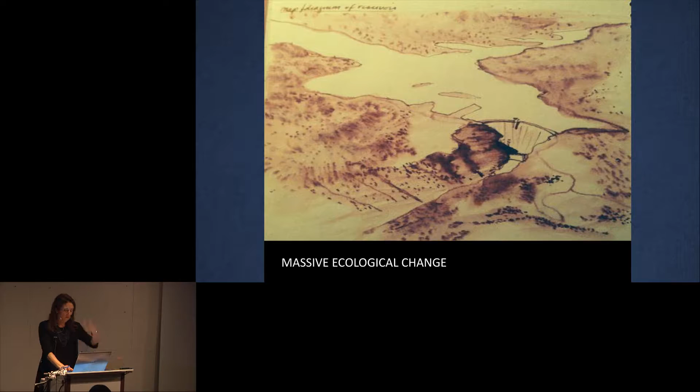But infrastructure, which is kind of my muse as a term, developed in the World War II era in reference to military logistical operations. And General Eisenhower, after the war, created the federal highway system with a $25 billion investment in our national infrastructure. So he called it the Federal Highway Defense System, and this is really important because it was a political issue.

You had a country that was really wounded by war, and he created this idea for connectivity that was pervasive, and it was cast as a way to make sure that every area of the country was safe because it was connected, but it also led to massive economic development in terms of the post-war suburb that we know today. And unfortunately, there are people in government who still believe that the building of these kinds of highways is about economic development.

The problem is, though, when our infrastructure is not being destroyed by robots or saved by Bruce Willis, we tend to find it a bit boring. As you know, infrastructure is not a sexy or a glamorous topic. As much as I like to think otherwise, infrastructure is not sexy. Infrastructure is not very sexy. Yes, infrastructure, like those men we just heard from, is not sexy. So I apologize for blowing the timing on that.

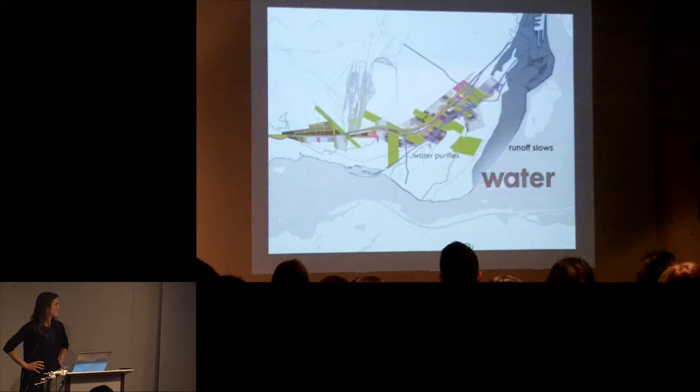Things you may have noticed in that video is that the infrastructure actually takes up a huge amount of space in the city, and it's an incredible opportunity for us to think about how these systems can be actually integrated with the urban design. So a lot of the work that I do relates to the intersection between roads and watersheds.

When the highway system was developed in the US at least, it wasn't really planned for going into cities. And so it actually took an extra 10 years to build. And so a lot of the work that we're doing now is trying to reconcile the issues that have been created by this, and water is one of the critical issues.

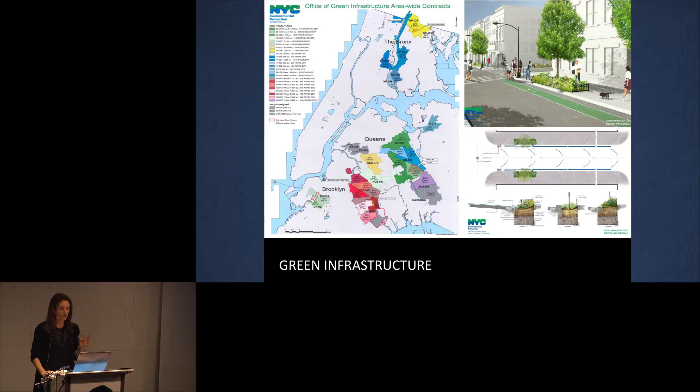So we've been working on a lot of different strategies, working with government agencies to develop new prototypes and thinking about watersheds throughout New York City, but also thinking about how these systems are compromised by climate change. I'm actually from Vermont, and this is what happened after Irene.

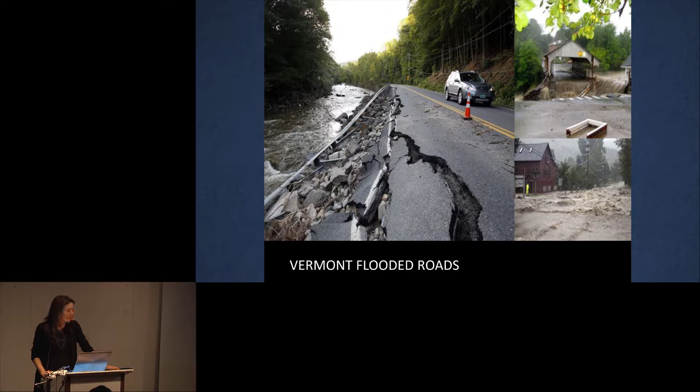So I think that, since Irene and since Sandy and since Katrina, there's been much more of a new awareness of urban hydrology. And that also is the case in the United States because of the signing of the Clean Water Act and the Clean Air Act in the early 70s. Nixon signed these laws and also created the Environmental Protection Agency, which is now actually putting pressure on city governments to clean up their water systems, their sewage systems, their freshwater drinking systems, and their stormwater systems.

And so on the local level, you get a lot of mayors that are now getting a lot of pressure from the federal government to make change. And we're fortunate to have a really brilliant mayor who was a great sort of organizer and created this thing called PlaNYC, a Greener, Greater New York, which had a set of metrics for how to improve the city. And some of those metrics related to improving the environment, adding green space, making the city more livable.

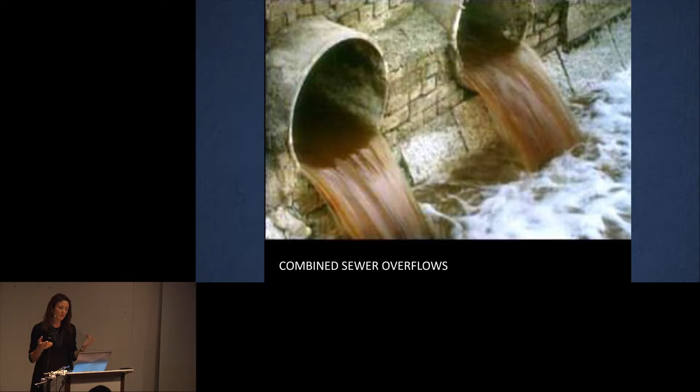But across the United States, there are 772 cities that have combined sewer systems. And Thomas Crapper did not invent the flush toilet, but he popularized it. And because of his work, the combined sewer system was invented. Basically it brings together sanitary sewers and stormwater sewage

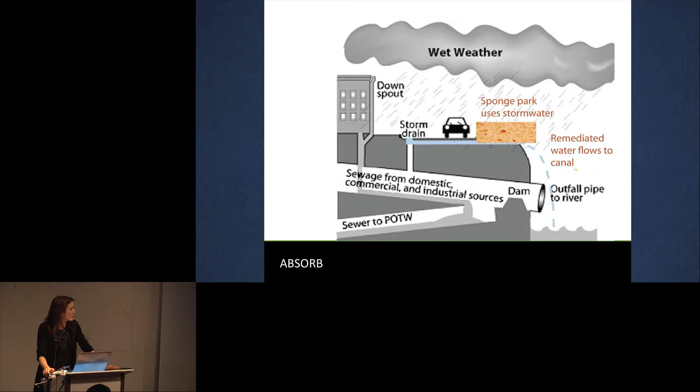So this first project I'm going to talk about is called the Sponge Park. And the idea is that we want to make more absorbent surfaces in non-absorbent urban areas to absorb this water to keep it out of the combined sewers. The project is located in the Gowanus section of Brooklyn. This is Gowanus. My office is right over here. And you can see that the area has transformed from a swamp in the 1700s to an industrial area by 1891, and then into a kind of quasi-post-industrial area by 2007.

So the premise of this is that wetlands act like sponges, but I wasn't going to go into a community and say, I'm going to put a bunch of wetlands in your backyard. That just wasn't going to fly, right? So I had to come up with a euphemism for absorbent ground, for wetland, for swamp, right? And so we came up with the Sponge Park, and people get it, they love it. Because what you're doing is basically making this surface more absorbent.

So in general, the firm tackles a lot of these global issues with local pilots, and the Sponge Park is a really good example of that, because we started doing the initial planning working with the Gowanus Canal Conservancy, which is a community environmental group, and we got a grant from the New York State Council on the Arts to do that initial planning. And then we applied for more grants working with the Gowanus Canal Dredgers and the Center for Urban Pedagogy, and we got a grant from the New England Interstate Water Pollution Control Commission. That enabled us to do working drawings for a first pilot project.

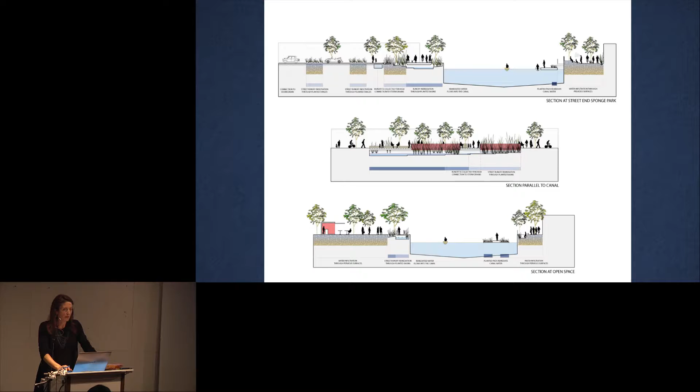But we added new programs. We were trying to create a continuous hydrologic system that sort of brought back some of the old swampland in a way, but it's an urban setting. So we're not going to just turn it all into parkland and bring back the swamp. We're going to make space that's usable. So this is an example of how we would do that with walkways over wetland areas that were sited below.

So when we started doing this work, city planning was actually thinking about redeveloping the area for residential use. And one of the things the city was doing is creating a lot of waterfront esplanades. Our city planning commissioner was the planner for Battery Park City. She had an idea of what waterfronts should look like, but there was this idea that there'd be an esplanade, and it would be either 20 feet or 40 feet. So we helped to suggest that it really should be 40 feet, that we really needed that additional space to create more public amenity.

But then what we noticed was that a lot of these buildings abut the canal and create blockages to the idea of a continuous esplanade. And of course they do, because this is a place of industry, a place of exchange, right? It was a place where you'd bring your boat in and you'd offload into a building that was right along the edge of the canal.

So we thought, well, maybe we shouldn't think about creating a continuous esplanade. Maybe we should actually think about maintaining that industrial character and creating what we called an urban promenade and bring the pathways back into the community. And in that way, we're not just privileging the properties along the water's edge, we're redeveloping the whole community. We're adding value to the whole community. And we're providing environmental benefit because we're greening those streets and providing connectivity to some of the existing parkland.

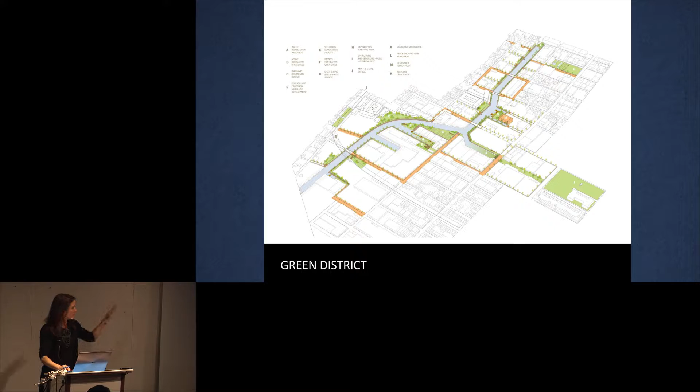And our idea was to create an entire green district. So you can see this was adding, I think, 5.2 acres of permeable ground to the area. We calculated that we needed 11 acres to basically absorb all the surface water runoff in the area. And there are already some existing parks. So this would pretty much solve the stormwater issues in the area without having to build billion-dollar sewage treatment plants.

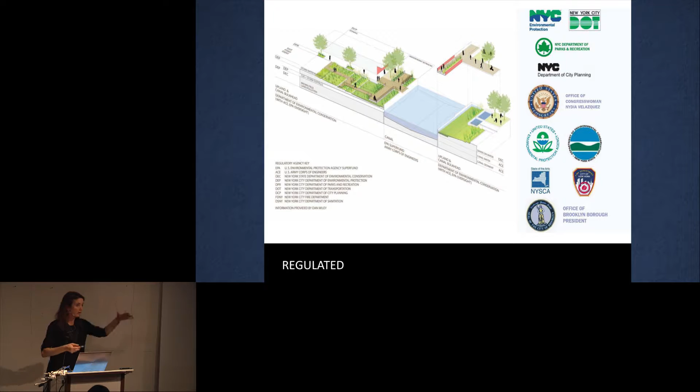So we started with a first pilot project, but just to explain what it's like to work in New York City and how complicated it is, the Gowanus is a navigable waterway. So the water is controlled by the Army Corps of Engineers. The sediment underneath the canal is also controlled by the Army Corps, but in the middle of our work, it was made an EPA Superfund, which added a whole other level of approvals. The first 5 feet of soil in the upland area is controlled by the Department of Environmental Conservation, which is a state agency.

The surface of the ground is owned by the Department of Transportation, which is a city agency. All the green is Parks Department, and they have to maintain that. The water that flows over the ground is the Department of Environmental Protection, which is a city agency. And then even the shade over the water is controlled by a state agency. There are 200 permits you have to get for any waterfront project, and it's phenomenal how long it can take and how complicated it is.

But one of the things that was really important about this diagram is that it showed the agencies that we knew who owned what. So it reduced the amount of churning that could exist where they're like, well, I don't know, so-and-so is in charge of this, and we could say, no, you don't own that.

DOT owns that, and you're in control of that, and you're in control of that. And so we were able to use this diagram to facilitate a faster decision-making process. It still took 8 years to get our first pilot done, but we're doing it.

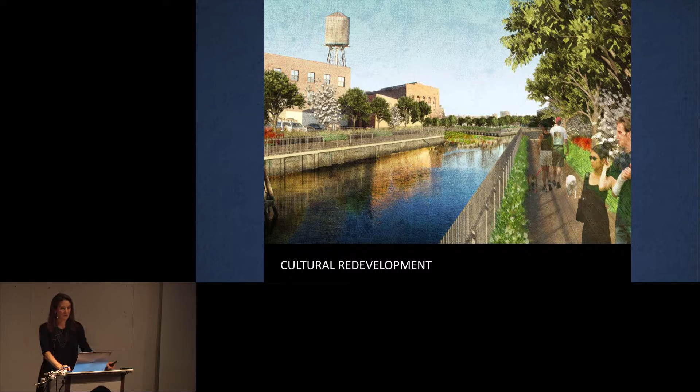So part of the overall master planning involved cultural redevelopment. We're actually working for a private entity that bought this building and is turning it into an art center, which is exciting because it was part of our plan. But this pilot project that took 8 years to build is right at 2nd Street.

And you can basically calculate the amount of water that's flowing down the street, and then you can create a stormwater system to manage that. But that's very sort of perfunctory and all that engineering. What we wanted to do was make a new open space that could be part of this overall system. So this is the first piece, and these street ends could be replicated. The idea is that it's a pilot.

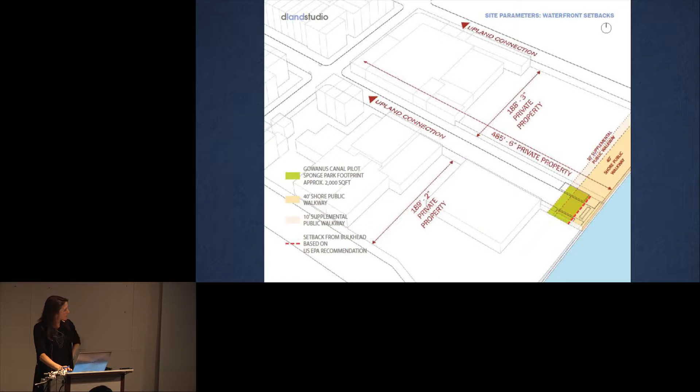So we worked within the 40-foot setback that the city had established. And this is the typical sort of street in Gowanus. You can see they're pretty degraded streets. But we had to submit our materials to another regulatory agency called the Public Design Commission. And the PDC is very sensitive about the use of materials and sort of the historic context.

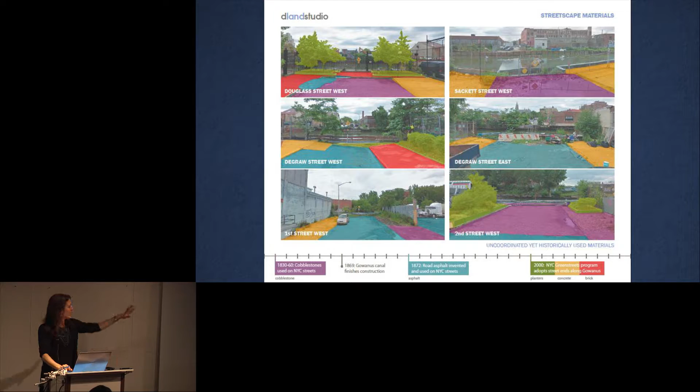So what we wanted to show here is that there are a lot of different materials, and they're kind of all over the place. And this is our existing street, and so what we're saying to them is, that's the existing condition, we're just moving things around. We're not actually making a huge change in terms of the historic context because there really isn't a historic pattern. There are a lot of materials and we're just reorganizing them.

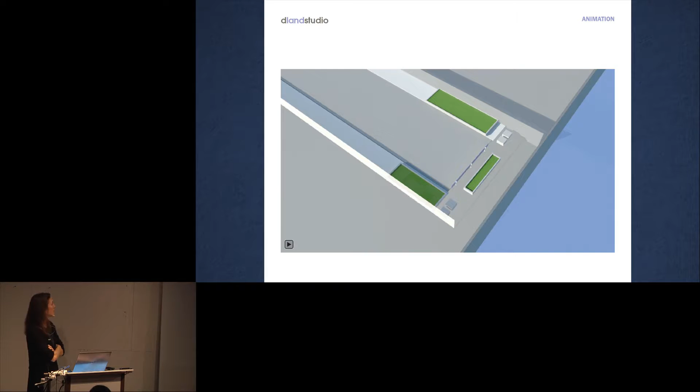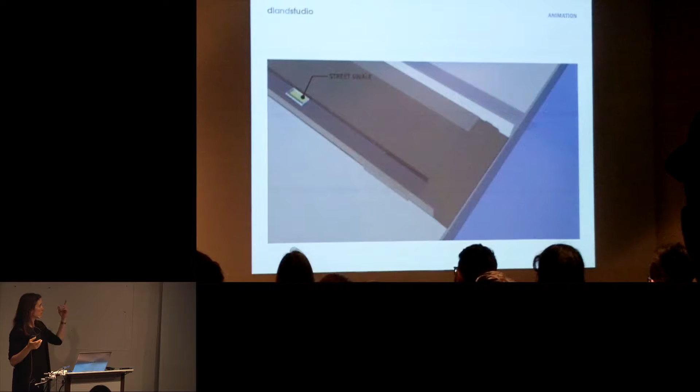So this is what our Sponge Park street end would look like, and this is kind of how it works. This one doesn't have sound. So this is the existing condition. These are these green streets that were put in by the Parks Department. So we're taking those out because they can only absorb the water that's falling into them. We're putting in new upland street swales, similar to the DEP standards.

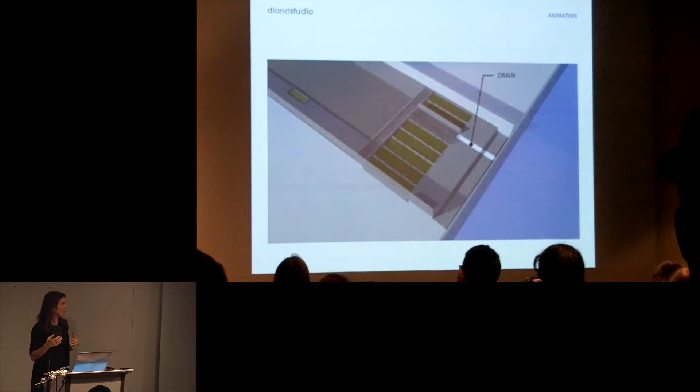And then this is really important. We built the whole system out of precast concrete cells so that it could be replicated very easily, and then put in this integrated sidewalk and sedimentation basin. And there's also a pedestrian path over a sand filter, so that's kind of an extra level of protection. And then a drain that goes into the canal.

So when it rains, basically the water's going to come down. Some of it's going to be captured by the upland bioswales, and the rest of it goes into this bioretention basin, which distributes it into the planting beds. And then the plants are going to be in the soil, and the plants are going to take up that water, evapotranspirate, use it to live.

Then if we get a really big rain above the 1.2-inch rain, which is 90% of all storms in New York, then it'll go into the sand filter and then go into the canal. So this area is tidal.

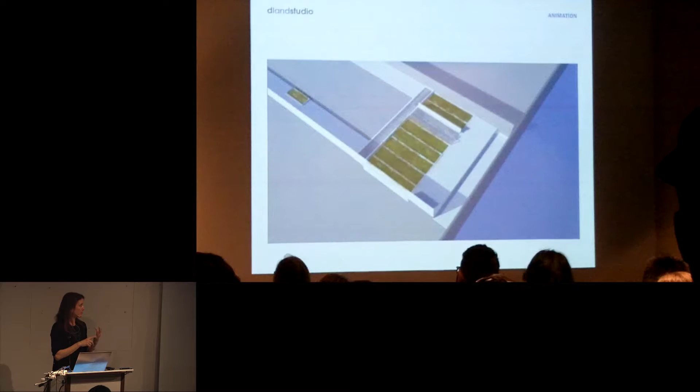So building a system that can be installed in a modular way quickly was really important, and the use of precast concrete was also really important because you can't pour concrete when you have the tides going up. The contractors had to schedule around the various tidal calendars. But I like to joke that it took 8 years to get all the approvals and 8 weeks to build.

So it was just like we had everything figured out, and it was kind of good because when we were doing it, the EPA Superfund people came out, the administrator, and he wanted to make changes. But we built it so quickly, which is great. It's like, sorry, Christos, we can't change that now, it's too late. And he said, you've gone too fast, sorry. Which is unheard of for a Department of Environmental Protection project. Their projects, they usually do $1 billion sewage treatment plants that take forever.

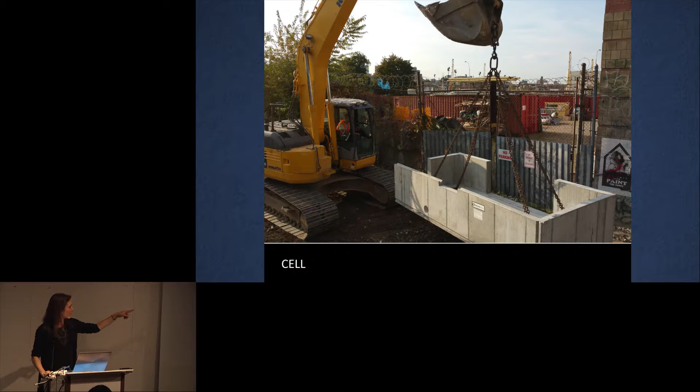But here you can see that the cells, they're big. It's kind of a big thing to do as a precast element, but here they are going into place, and this is it on October 21st, and then this was when the New York Times photographed us. The plants look kind of cruddy right now because it was put in kind of after the frost, but I think in the spring they'll come to life. With landscapes, it takes a little while for them to take off.

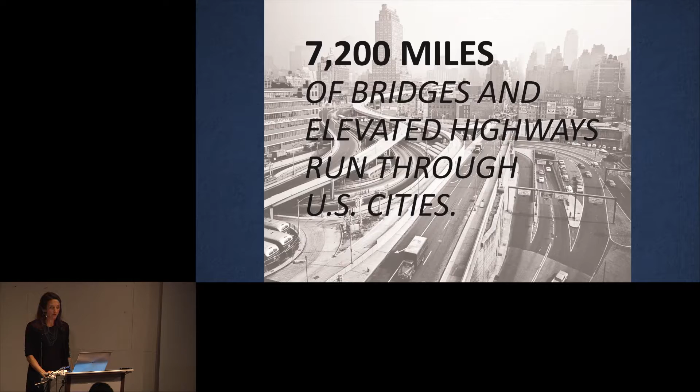There are 7,200 miles of bridges and elevated highways that run through U.S. cities, and I've been the Urban Design Fellow for the Design Trust for Open Space. And this is something that I was looking at for years before I became the Urban Design Fellow. And it's sort of a great marriage in a way, working with them, because we're looking at the 666 miles of elevated structures in New York.

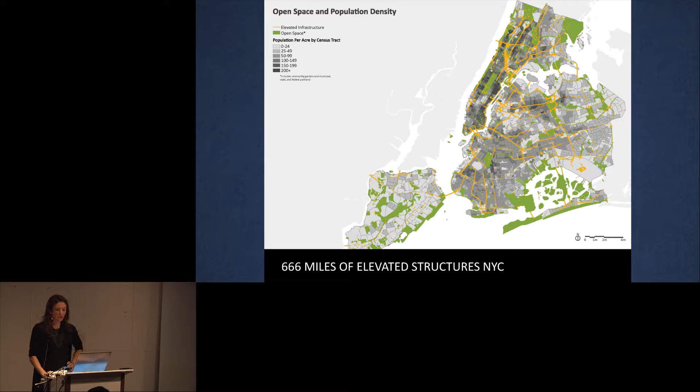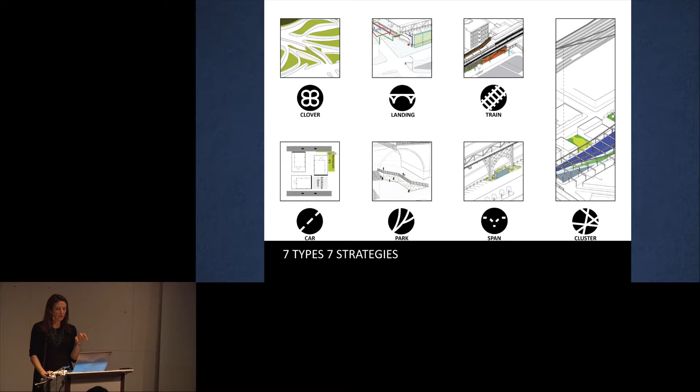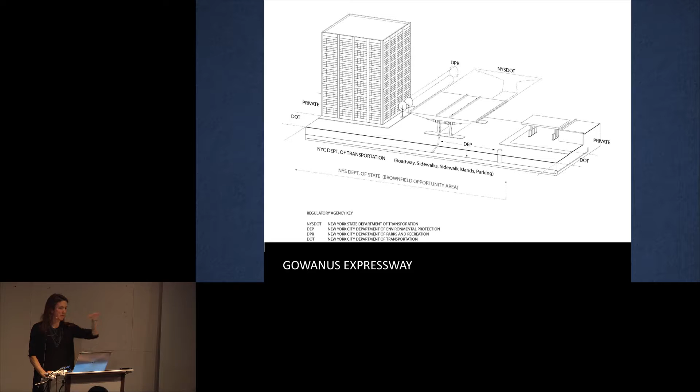One of the places that we looked at was the Gowanus Expressway, which is a very typical condition of a large expressway with a lot of space underneath that's currently used for parking. It's not the highest and best use of this space, in our opinion. So we thought, why don't we start to take it over and think about how we can manage some of the water coming off of the raised highway in like a pop-up green infrastructure system.

And then maybe we can start to also have spaces underneath this highway where you can have maker space, where you can have artist studios, where you can do the stuff that's being displaced from some of the inner manufacturing districts. Like Gowanus is now becoming much more residential. So the artists don't have anywhere where they can make a mess and make noise. And so we thought, why not have a place where you can have saws and do welding and that kind of thing.

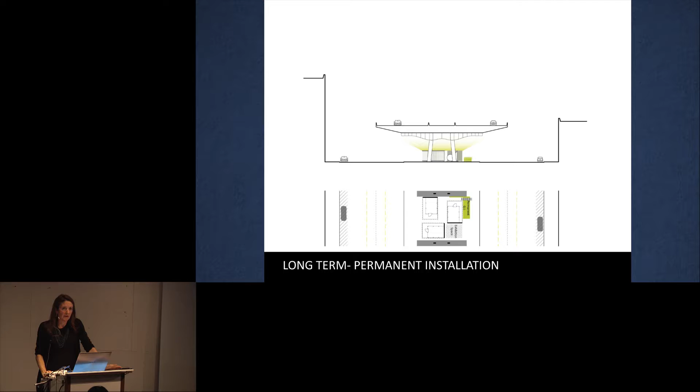And then in the long term, maybe we turn this into art studios. We actually have something that can exist in that space, free of the columns, because the people who maintain these bridges want to be able to have access to the columns on the underside of the structure. But there's a lot of space there. And we should be using it because it's just too valuable to waste or to just give to parking.

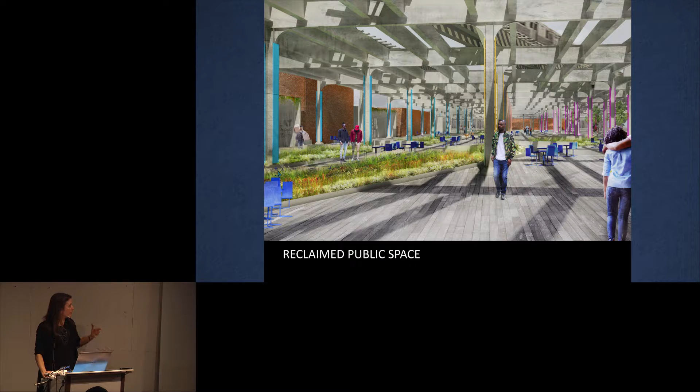Then in another area, Broadway Junction is a place where you have subways and cars and trains all coming together, and it's incredibly hard to sort of figure out where you are. So we want to try to reclaim that public space with wayfinding and planting and seating and make it into something that sort of celebrates the infrastructure rather than just sort of manages it.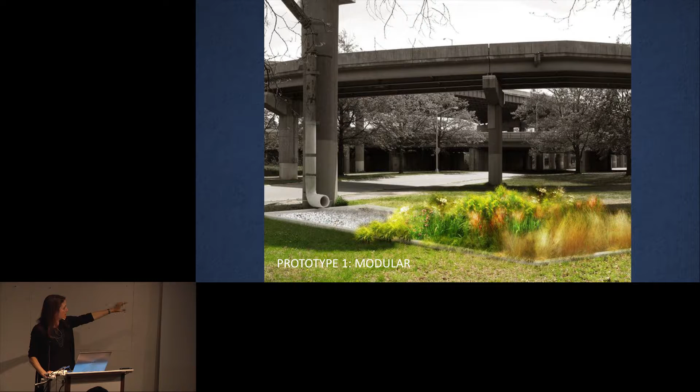So here you can see we basically just took the section of pipe off. It was just allowing the water to go out onto the street. So we took that off and we put on our own new pipe, which was probably the biggest challenge, having the state DOT let us touch their pipes. But we built this in a public park, and you can see again there's the sedimentation basin over here, and then this is it in construction. And then this is the one with the gabions.

Now, one of the issues that happens when you create wildlife in the city, or you make a house for wildlife in the city, is that we've created the perfect habitat for this muskrat. We're monitoring all of our projects to see how much water is coming in, how much water is going out, and what the water quality is going in and out of the system. And we have these vaults with the monitoring equipment. And the angle at the bottom of the vault, there's a slight angle so that it will drain, was the exact angle of a muskrat lair.

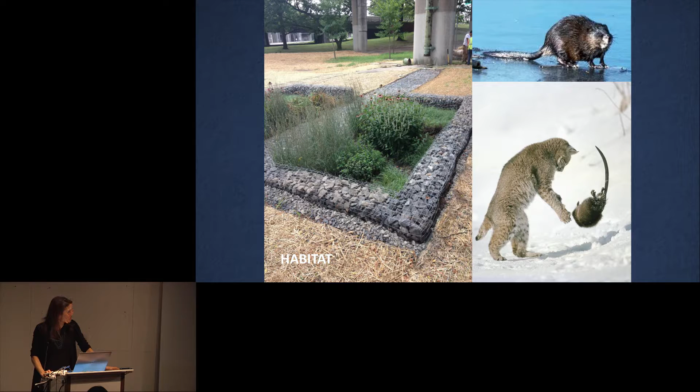Like the things you wouldn't think to research as you're designing your green infrastructure. But anyway, this muskrat moved in and was like, hey, they built me a condo, this is really nice, but he was chewing up our monitoring equipment and leaving candy bar wrappers and just all this crap in the vault. So we didn't introduce bobcats. We actually came up with some other design solutions. He's just there for scale, but you never know.

So there are 35 million US residents who live within 100 meters of a 4-lane highway. And for the last decade, I've been working on another muse, the Brooklyn-Queens Expressway. This is actually fairly close to my office. This is Carroll Gardens and Cobble Hill. So I had a grant from the New York State Council on the Arts and created this vision for that section of the BQE, which then got the attention of a city councilwoman who hired me for some additional work.

But one of the things that I found really important early on was to attach design to economics. We used U.S. Forest Service data to create this diagram that suggested that 350 trees would generate a $50 million gain over 10 years. So this shows the power of communication through design. Because this Forest Service document was just this really boring tome, a lot of words, and we turned it into this one-page diagram.

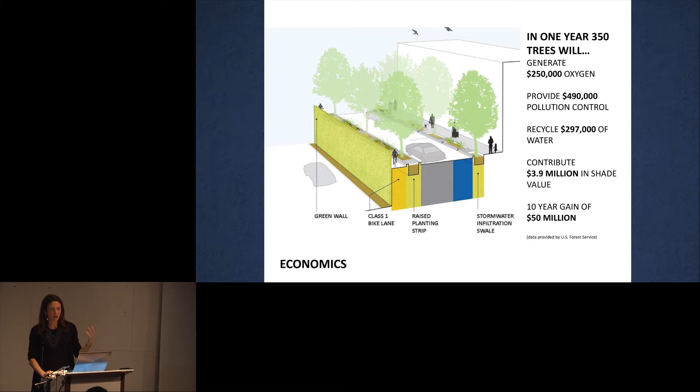So we can substantiate everything we did by going back and referencing that document. But the suggestion that we're creating all this pollution control and oxygen generation and shade value is incredibly powerful and can be used as a political tool. And who was the master of politics more than Robert Moses, who created the Brooklyn-Queens Expressway in the first place. Moses did a lot of great things in New York. He created a lot of parks and playgrounds and open spaces and parkways to get people out of the city and out to the country and the beaches.

But unfortunately, he also did this. He created landscapes like the Cross Bronx Expressway and the BQE, which really did a lot of harm to communities. I would say he did kind of a bait. He proposed these beautiful parkways. And I just want to read this.

And he, Robert Moses, spent a lot of time looking down at it, watching the cranes and derricks and earth-moving machines that looked like toys far below him, moving about in the giant trench being cut through mile after mile of densely packed houses, a big black figure against the sunset in the late afternoon, like a giant gazing down at the giant road he was molding.

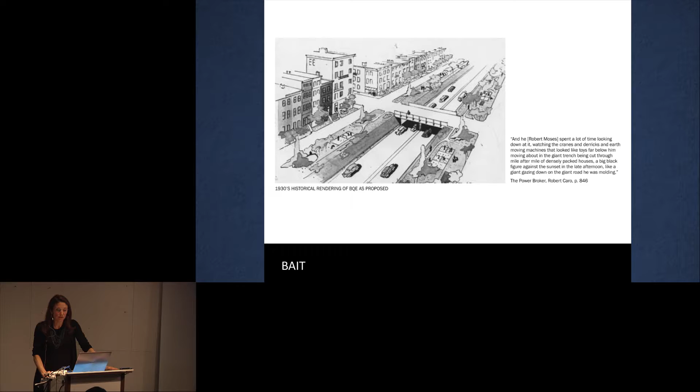This is from The Power Broker by Robert Caro, which you should all read if you want to be students of infrastructure. But he had an apartment in the Bossert Hotel, which actually looked down at this from Brooklyn Heights. And so these are the actual derricks cutting through this brownstone neighborhood. So all of these brownstones were just eliminated to make this big road.

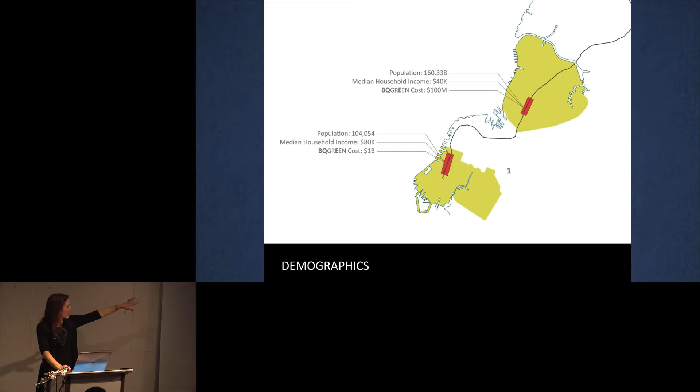So I've been working in a couple of areas. I mentioned that I started looking at the BQE down in Carroll Gardens, but then Councilwoman Reyna saw that work and brought me in to work in her neighborhood, which is Los Sures, which has a much lower income and a much higher population. So it's actually a much less expensive project. I feel like it's something that just has to happen. So I've been helping her politically for the last decade on this one as well.

But the BQE creates a lot of physical boundaries, which you can see in both cases. The section that we're focusing on was built in 1950, and that's important to remember. It's an area that creates territorial boundaries, with the Dominican gangs on one side and the Puerto Rican gangs on the other, and the highway actually creates the site of conflict. So we want to think about that.

We looked at public health issues in relation to the BQE trench, physical activity levels, and neighborhood poverty. All of these data sets were used to make an argument that this park space should go in. And then we also looked at the amount of open space.

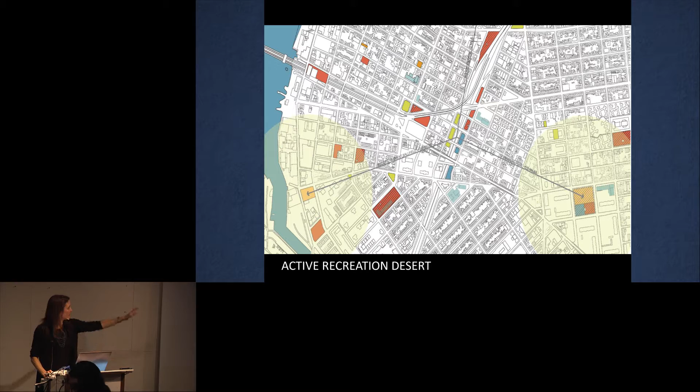There is some space along the trench that is used for tot lots, but there isn't a lot of active recreation space. There's no space for teenagers to go run around. And that's a problem given the high incidence of gang violence in the area.

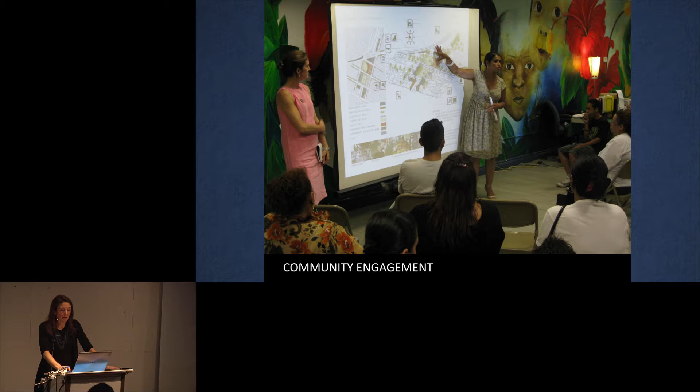So through a lot of community meetings, this sort of traditional one, and also going out into the playgrounds, into the churches, we worked with the community, and what they said was, we really want to have play space. We want to have playing fields on top of this trench. And so we came up with this plan that has a baseball field and then a flexible playing field over the trench area.

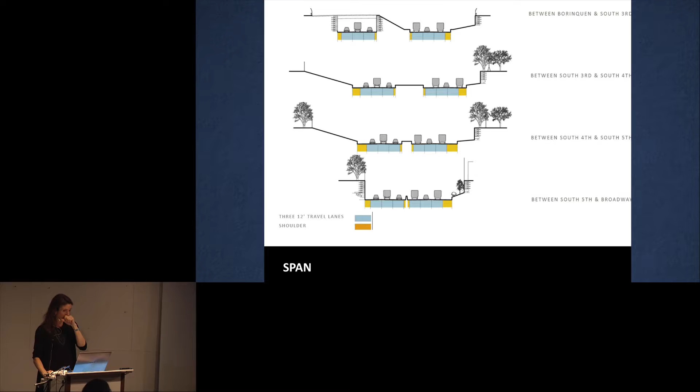And that's actually really important because we worked with Weidlinger Engineering to figure out the feasibility of actually capping the trench. And what we found was that there were certain areas where it actually made sense because we could touch down in the center. We have to keep the deck fairly thin because we have to bring the road up to new federal highway standards. So that means we need 16 feet of clearance.

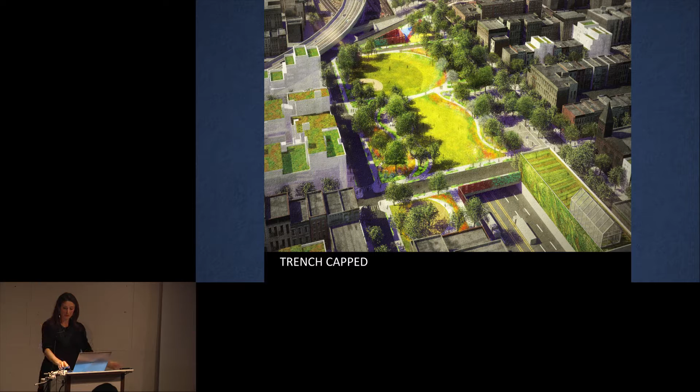And because we have to keep the deck fairly thin, that means that we can't put a lot of weight on it. So if you notice in these drawings, we have a lot of trees on the side, but not in the middle. So in our plan, our idea is that we have field turf, artificial turf over the center for the playing fields, and then we do real plants over on the side that can be more verdant and green.

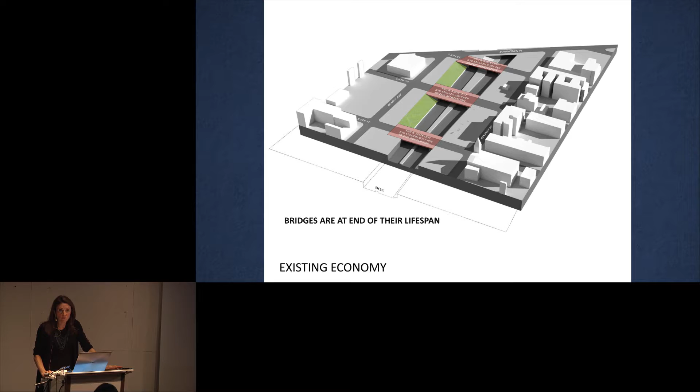So the other issue we were thinking about is the age of these bridges. This highway was built in 1950, and these bridges are really at the end of their lifespan. They cost about $10 million each to replace. So we thought, why don't we leverage that against a federal, state, or private grant to basically make this park happen. So the expenditure of the $30 million has to be made by the city.

So, that's already in the budget, right? And so why not actually use that to create something so much more important and meaningful for this community, to turn this passive open space into something that's much more active and meaningful to people.

So over the last couple of years, I've been working with the Trust for Public Land on a project called the Queensway. There are 20,000 miles of rail trails in the United States, and the Queensway is adding another 3.5 miles. The Queensway runs through the center of Queens. It's 3.5 miles long, 47 acres of new park space for New York City, which is pretty good. And 40 of those acres are currently DCAS property, which is not really owned by any agency. It's kind of in limbo. And then 7 belongs to the New York City Parks Department.

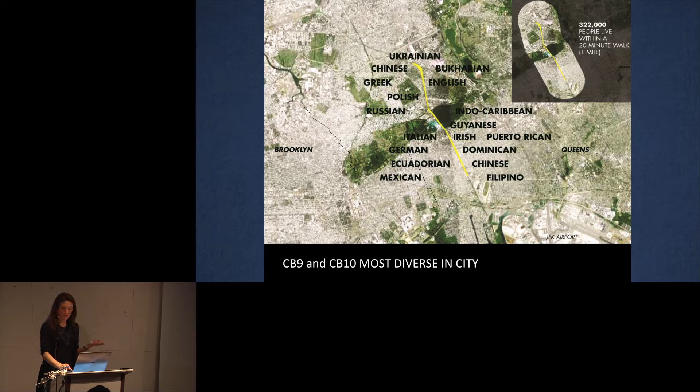So we worked on enhancing the programs in different areas and we had a lot of community meetings trying to figure out what people wanted and what would be most viable for each particular area. And one of the things that's really interesting about it is that it was a train line. So trains have to stay, in spite of what Bjarke Ingels thinks about trains going up and down, they don't go up and down, they go flat. And they have to stay flat, unless you're in an animated cartoon.

So because they have to stay flat, the upper part is on a bit of an embankment, and the center part is in what looks like a ravine, and then the bottom part is on a structure that looks kind of like the High Line.

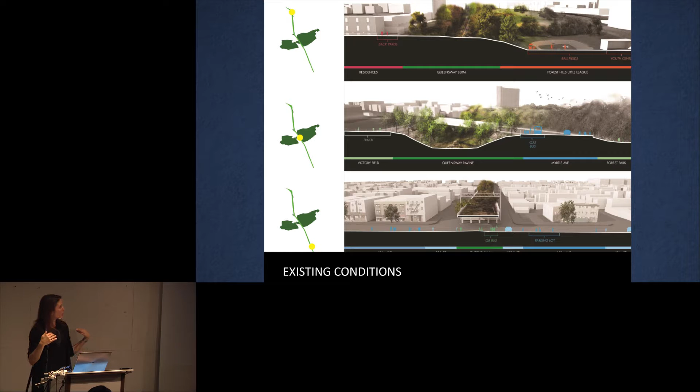So the reason for that is that the center is actually in this area that is cutting through the Wisconsin Glacier. So there was this terminal moraine from the Wisconsin Glacier. So it's not actually going through a ravine, it's actually cutting through a big pile of gravel and rock and smaller stone. But you can see how these two drawings don't actually look that different. This is a very sort of soft approach to the transformation of this landscape.

We're cleaning it up, we're adding new trails, we're improving the ecology. It's a real park, it's a practical park. It can't be the High Line. It's not like the middle of Chelsea. This is like a working class neighborhood. This is actually one of the poorer areas of New York City. So we're trying to do things that are really strategic so that it can become a great public park for people that live there.

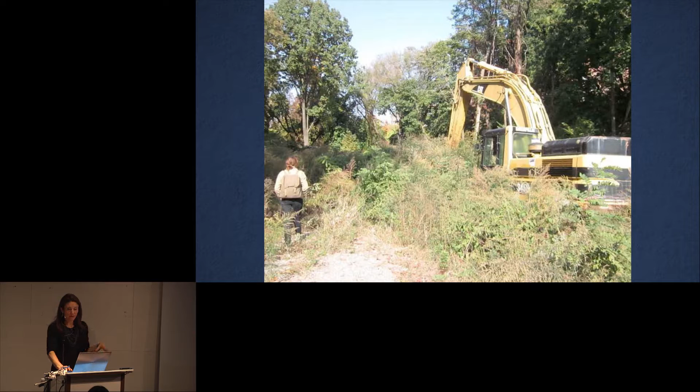So this is the northern section, which is actually in Forest Hills. That vehicle isn't doing anything there, it was just left there. I don't know why, but we want to transform this space. We wanted to make it a productive landscape and a beautiful landscape and a useful landscape. So there are new pathways and play areas, and this is actually a whole stormwater management system for the whole area.

The stone, I mentioned that we cut through the Wisconsin glacier. One of the themes that we're developing throughout the entire Queensway is the use of these stones, because in the northern part of the site, the stones were used as boundaries for the old Dutch farms. So we're drawing upon that cultural reference and then also drawing upon the geologic reference, trying to really give meaning to this place.

When you have a site that's been left alone for 60 years, you end up with a lot of really big, beautiful trees. And so we're capitalizing on that neglect. You can't buy time in that way. So what we're doing is clearing out all the poison ivy and the Japanese knotweed and creating this new seating area so that you can watch your kids play ball. The playing fields exist. And so we're trying to take advantage of that and make new spaces adjacent.

So there are a number of houses that exist along the edge of the Queensway, and the people who live there are very sensitive to building a path in their backyard. And so what we did was we tried to really shape this landscape to create more of a buffer and help with erosion issues, but also make it so that you didn't feel really isolated when you're on the path, keep it visible enough.

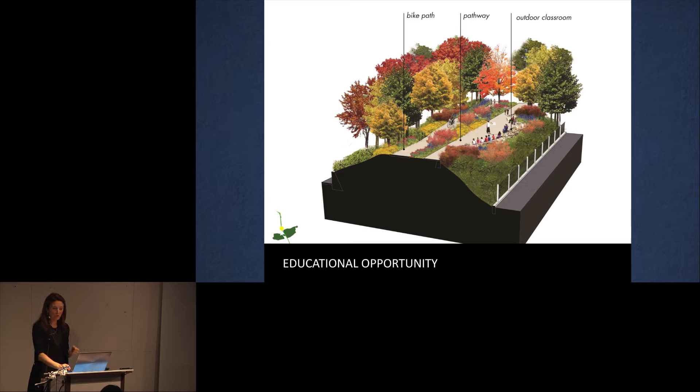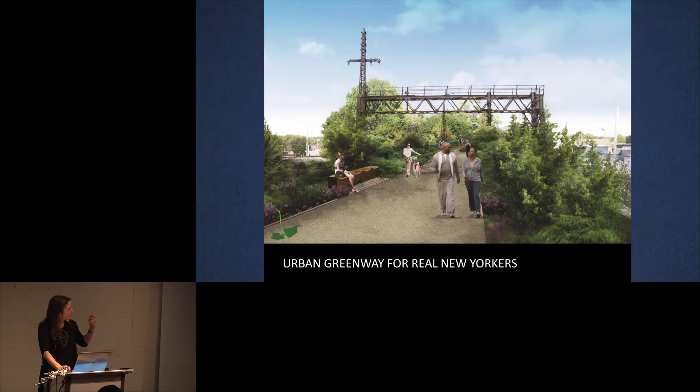And ultimately what we're trying to do is make an urban greenway for real New Yorkers. This is the southern section. You can see it's simple, but we're maintaining the old tracks in some way, but in a very sort of quiet way.

But then with containerized shipping, all the shipping moved away from the waterfront. And so by 2010, we ended up with a waterfront where the highest and best use was recreation and residential use. And I would say that that still is the case, although I think some people are thinking slightly differently about it just because of Sandy, hopefully.

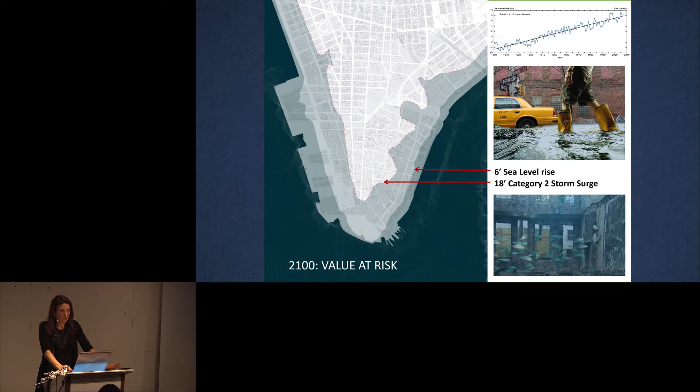So we mapped the value at risk for 2100. We mapped the 6-foot sea level rise that was projected. Everybody in our group used a 6-foot sea level rise, which assumes rapid ice cap melt, and then an 18-foot Category 2 storm surge. This is the existing seawall in 2010. This is it in 2100 with 6 feet of sea level rise, and this is with a Category 2 storm inundation. And these are existing combined sewer overflow locations, so just like Gowanus.

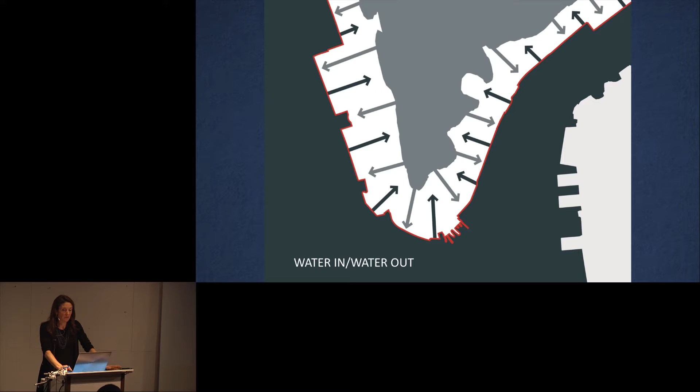So our notion was water is going to come in, and we want to get it out. So how do we create a system to do that? And our idea, or our concept, was to create a new urban ground. So we created these level 1 streets for absorption. 27% of New York City is paved with streets. And so we thought, you know what, there's an opportunity there. What if we made them all permeable?

So I moved all the infrastructure, all the gas lines and water lines and fiber optic lines. I moved those all into waterproof vaults underneath the sidewalks with hatches so that you could get in if they ever broke or became obsolescent. And then we had these level 2 streets for distribution and collection. So here we have the absorptive streets in the same system as before, but we had an additional layer of conveyance of additional water. And then these level 3 streets for protection.

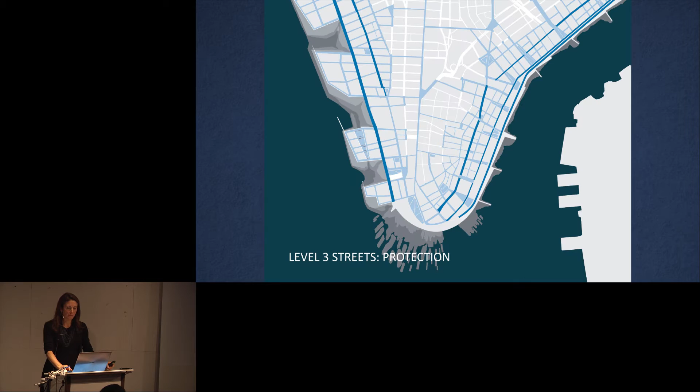So the thought with this was if you had a big storm surge, all that salt water could come in and be retained underneath the roads, in certain roads, and then go out when the tide went out. And this was the whole idea about a porous green street system. So that's just the streets.

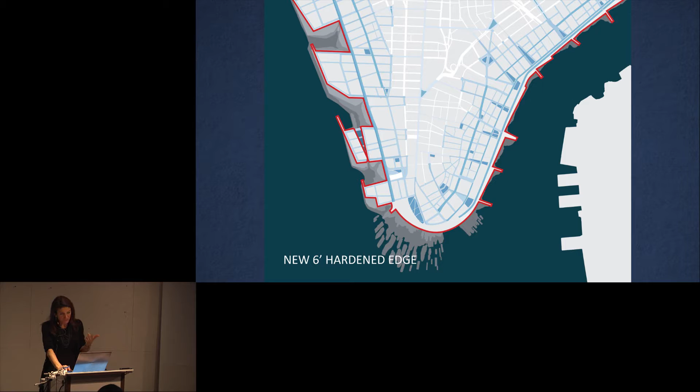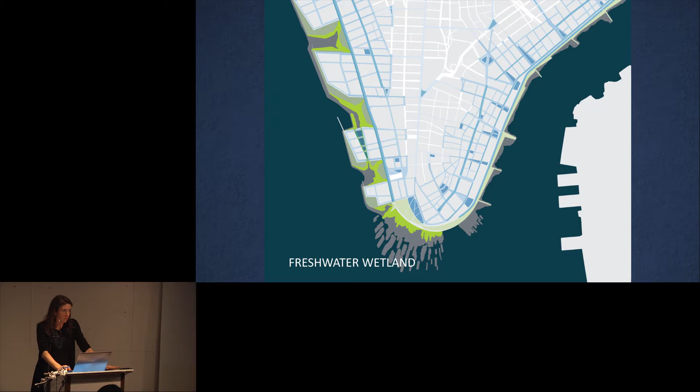And then we needed a 6-foot hardened edge. So we're going to raise the level of the grade by 6 feet, and then create new waterfront parks that could absorb the surface water runoff on a normal basis, and then freshwater wetlands that could absorb that water as well, and then salt marshes to help to dissipate the force of storm surges to create an entire resilient system.

So just to give you an idea what that would look like, along the Hudson River estuary, we created a new kind of crenellated urban design pattern. We cut into Battery Park City. We knocked down a whole bunch of buildings because you can do that with a museum exhibition. And we created these zones that were new kinds of landscapes, protective landscapes that also provided access for small boats to go in between the buildings. The water is sort of threading into the urban fabric, and here you can see how that looks.

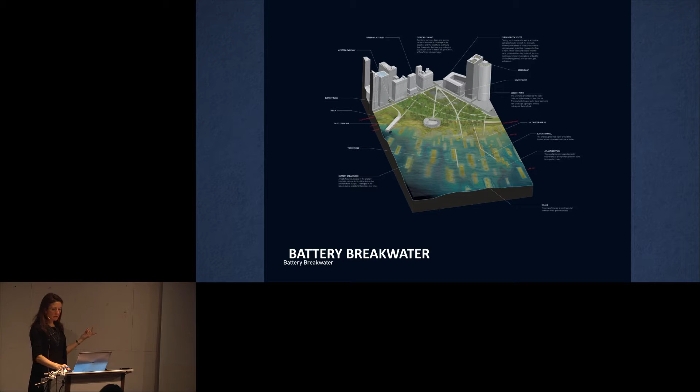And then down along the end of Manhattan, we had the Battery Breakwater. Again, this is a place where you could have small craft, and these would develop over time. We drew it as a geometric pattern. They were geotextile sacks that would be planted. These are actually existing in the shallows, so they wouldn't just wash away. But we did maintain areas for channels for ferries and boats to get in.

And then over along the east side, we created the East River esker and breakwater. The thought here was that we'd create an esker as a geologic formation. It's a sort of snake-like berm that would exist all along the east side to protect the resources there. And then outboard of that, we'd have these new wetland areas with walkways out over them. And then also, in the historic slips, we'd have what we call these sponge slips.

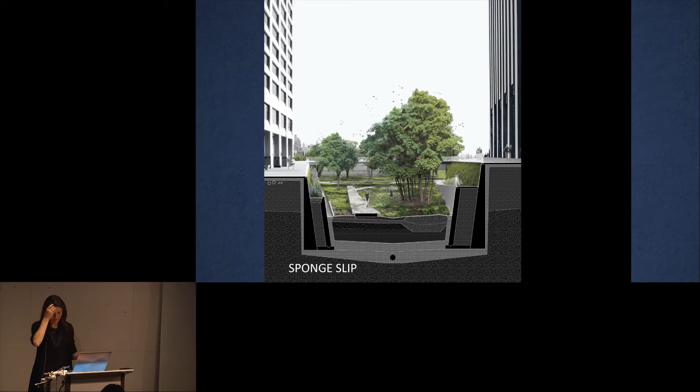So these were places that, again, could take a lot of water if there was a really big flood. But the plants were specified that could handle periodic inundation of salt water. And this creates an entire resilient city. We calculated how much water was coming in and sort of figured it all out.

And we worked hard to get the city to start to make changes. And the city was slowly starting to adopt at least some of the edge strategies when we had this big storm called Sandy. It was really interesting because this is where the water went. It basically went to that 1625 water line, and it went back to that 1845 hydrologic map of the land, and turned the lights out because the infrastructure wasn't protected in waterproof vaults. And it caused, I think, something like upwards of $50 billion worth of economic loss for the city.

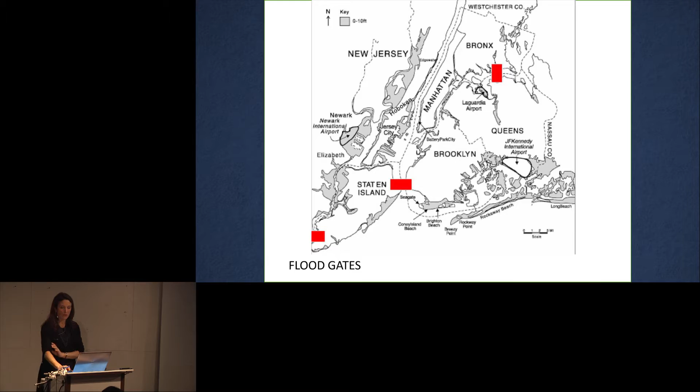So after, there were a lot of proposals to put in gigantic gates to keep the water out. And this is what they look like. And these hard infrastructure systems are massive, and they work until they don't. And I think that's one of the things I've been thinking a lot about with a lot of these huge water impoundment systems, because unfortunately, they have a limit.

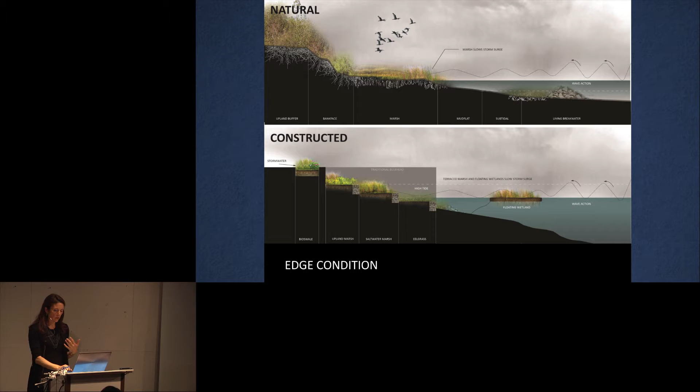So I thought, why don't we create hybrid systems that actually are working with natural and constructed systems? So use the strength of the engineering, but then have something that will grow and adapt over time. So that's sort of one layer of thinking, like, okay, let's adapt. And then my other thought was, maybe we should just move. And I started thinking about the economics of being on the water's edge, and the economics of just being in New York City in general.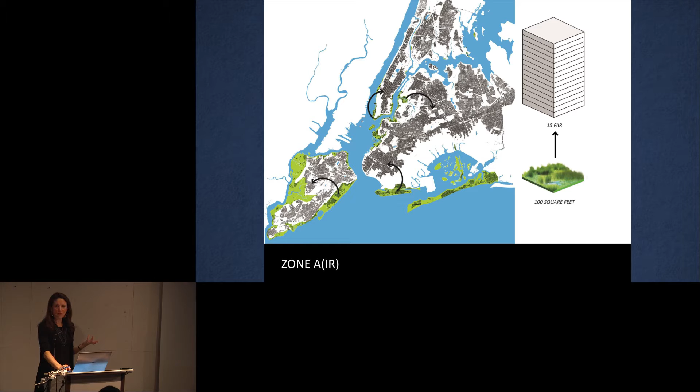Because one of the big hurdles that we face in creating these landscapes is they're really expensive and they have to be maintained. And they're kind of experimental also. So it's going to take a while before we can actually make this start to happen. But I think something needs to happen. And so we're working on a lot of projects that I think are sort of inching away at getting us closer to the development of those edge landscapes.

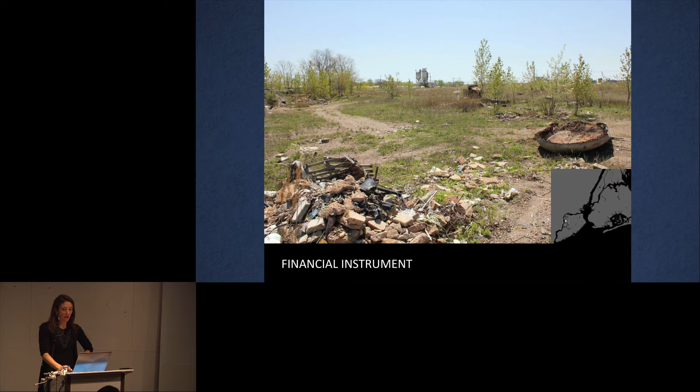And this project is one of them, the Marshes project in Staten Island. And it's the first wetland mitigation bank in New York State. And you probably do this here, like all over the place. I don't know. It happens in a lot of other places in the United States, but it's not happening in New York yet, so this is the first one. What we're doing is we're restoring this landscape that has been really degraded and turning it back into a wetland. It's a financial instrument where developers in other places can buy credits in this landscape. So in a way, it's kind of like my zone air project, where it's a transfer of sort of value from one place to another.

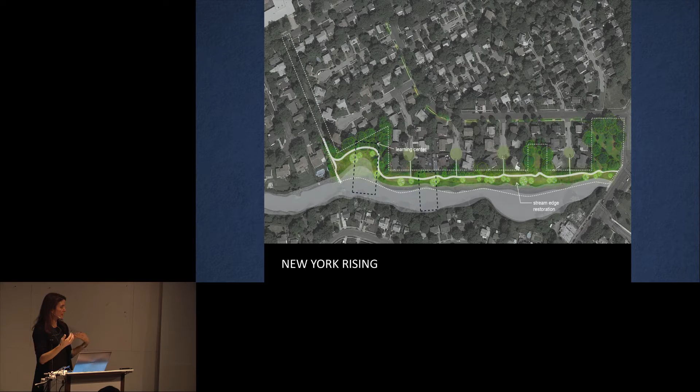So we're also working on the New York Rising project, which is the state effort to rebuild post-Sandy, reshaping some of these edge landscapes, creating wet meadows, and really also reshaping the bathymetry of the surrounding waterways in order to have more capacity to absorb that water, and also to slow the waves.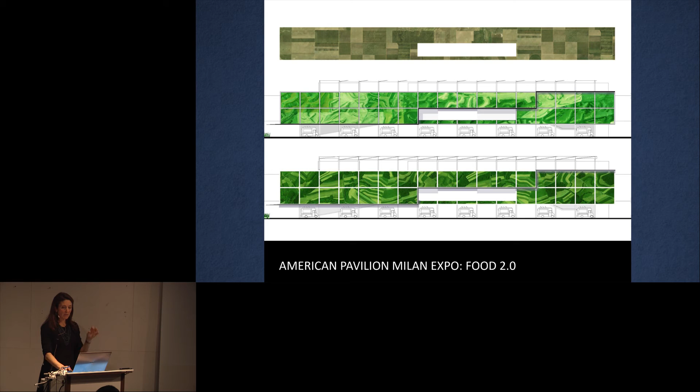And so we looked at this grid and how regularized that was, and thought, but there are all these geographies that really reflect the true flavor of the American landscape, and they also affect the flavor of the food that's coming out of the American landscape. So why don't we create a system that really talks about some of these new ideas about smaller scale farming and different kinds of food production.

And we built this vertical wall for this pavilion. Michael Bierut from Pentagram designed the logo for the American flag. But it was this amazingly productive landscape. We had 50 different crops. We used a lot of heritage seeds, but it produced 6,000 pounds of food per week.

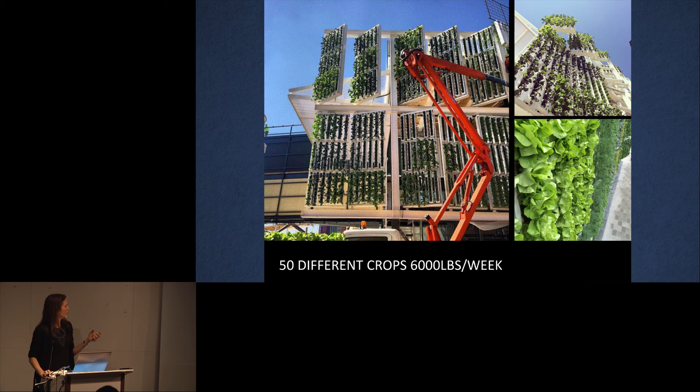We used something called a ZipGrow tower, which is actually an agricultural product that was designed by an agronomist out of the University of Wyoming. So it's kind of remarkable, but it's also really quite beautiful. So we designed these frames out of steel, and then we integrated the irrigation into the hydroponic system. And the water goes down each of these towers. And these things just pull out, and there's a little irrigation tube.

And when I visited him out in, I think it was Aurora, Colorado, at one of the farms that was run by this guy, Hayden Christensen, who was this farm kid, he told this story about how there are a lot of kids that want to keep farming, they're like the 13th kid, and the section of land that was bought by the ancestors in the 1850s or earlier has gotten chopped up, either because of real estate development pressures or because you have big families and they divide up the land into smaller portions. So by the time Hayden Christensen came around, there wasn't a lot of land left for him to keep farming.